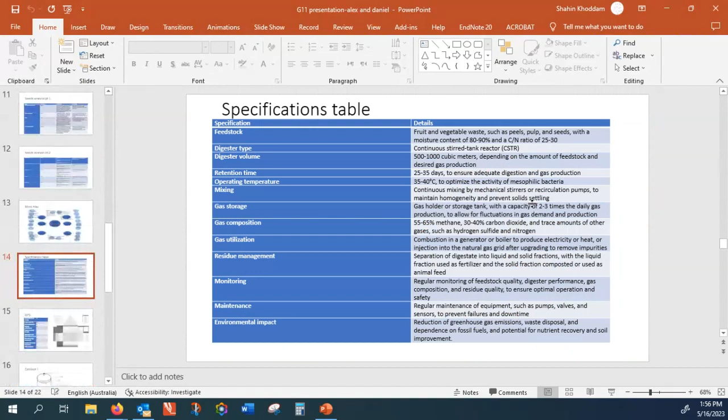I think I also sent it, you should be able to access it quickly on that one. All right, just let's make sure this is the one you want to present. I'll go through this quickly, just have a look. Yeah, this one has everything. Very good, and you know how to play this? Yep. All right, great. We've got 3 minutes to start, but don't rush. Just do Sultana's plenty of time. And let me check Sultana's presentation also.

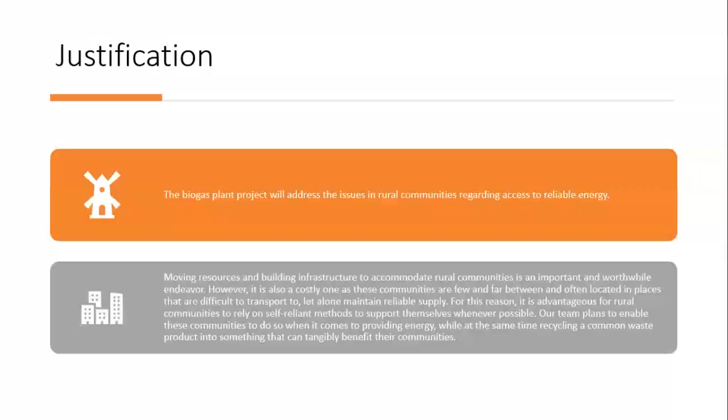Okay, good afternoon everyone, Noah, Kai, and everyone. Thanks for coming to this first presentation session. Today we have two presentations; one of them has been postponed to tomorrow, that of Noah, given that he is the only presenter. So we have plenty of time. It would be roughly about 15 minutes per presentation, followed by questions. Feel free to ask questions, and I'll provide feedback. The feedback isn't specifically directed at any one person, it's very general, so interpret how it applies to your case, okay? So for the first presentation, I invite Alex and Daniel. Would you start your presentation? Okay, thank you. One second.

Could you close the door?

So we did a biogas plant to generate gas from fruit and vegetable waste. The aim is to efficiently convert fruit and vegetable waste into biogas that can be used to produce energy, while reducing the amount of organic waste going to landfill. The facility will use anaerobic fermentation to produce biogas from waste, which can then be used for electricity, heat, or transport fuel. By producing renewable energy from waste, the plan is to promote sustainable development and environmental protection.

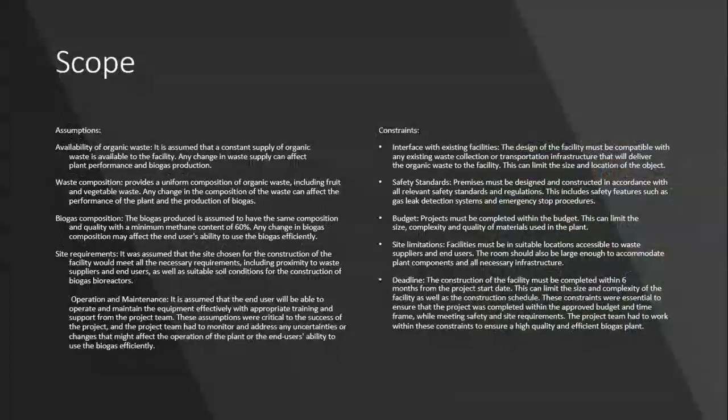For the scope assumptions, the first is availability of organic waste - it is assumed a constant supply is available to the facility, and any change can affect plant performance and biogas production. Waste composition provides a uniform composition of organic waste, including fruit and vegetable waste; any change in composition can affect performance. Regarding biogas composition, the biogas produced is assumed to have the same composition and quality, with a minimum methane content of 60%. Any change in biogas composition may affect the end user's ability to use it efficiently.

For site requirements, it's assumed the chosen site meets all necessary requirements, including proximity to waste suppliers and end users, as well as suitable soil conditions for construction of the bioreactors. For operation and maintenance, it is assumed the end user will be able to operate and maintain the equipment efficiently with appropriate training and support from the project team. These assumptions were critical to the project's success, and the team had to monitor and address any uncertainties or changes that might affect plant operation.

Other constraints: interface with existing facilities, the design must be compatible with any existing waste collection infrastructure that already supplies organic waste to the facility. This can limit the size and location of the plant. For safety standards, the premises must be designed and constructed in accordance with all relevant safety standards and regulations, including safety features such as gas leak detection systems and emergency stop procedures.

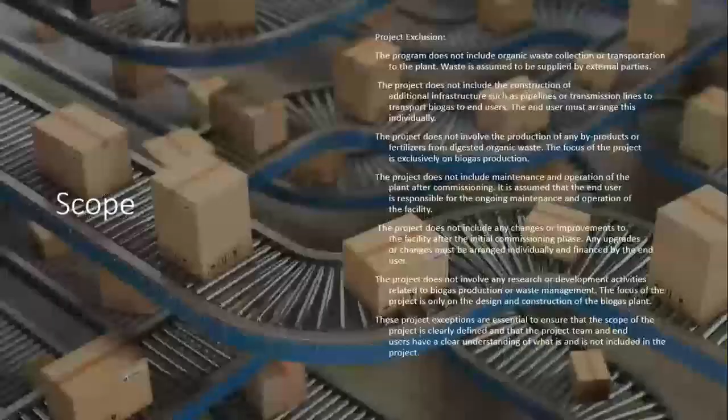The project exclusions: the program does not include organic waste collection or transportation to the plant. Waste is assumed to be supplied by external parties. The project does not include the construction of pipelines or extra transmission lines to transport biogas to the end users. The end user must arrange this individually.

The project does not involve the production of any byproduct fertilizers from digested organic waste. The focus of the project is exclusively on biogas production. The project does not include any changes or improvements to the facility after the initial commissioning phase. Any upgrades must be made individually by the end user.

These project exclusions are essential to ensure that the scope of the project is clearly defined and that the project team and end users all have a clear understanding of what is and what is not included in the project.

So, team communication methods: for the most part we used the Big Blue Button feature, which was within some of the infrastructure website and all that, right? But we were also able to communicate through text messages, and we did also meet up and all that. So we were able to communicate in response.

Yeah, this was one of our meetings. We've had, I think, 3. Yeah.

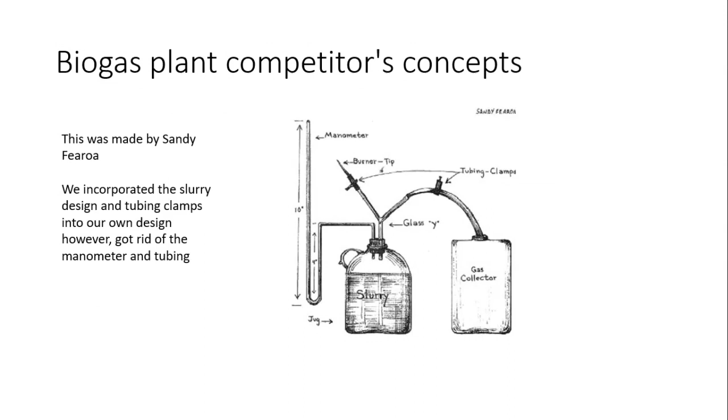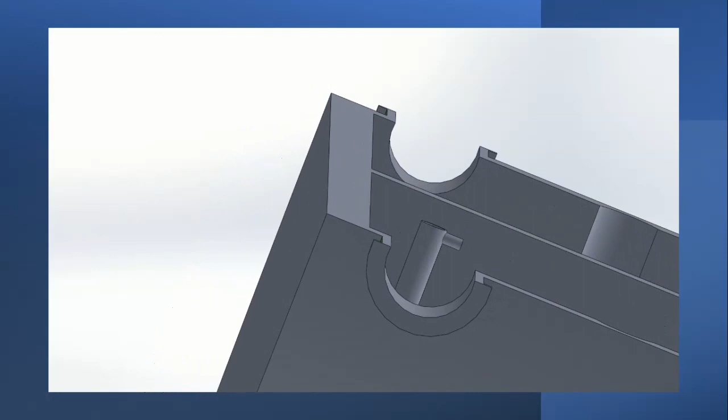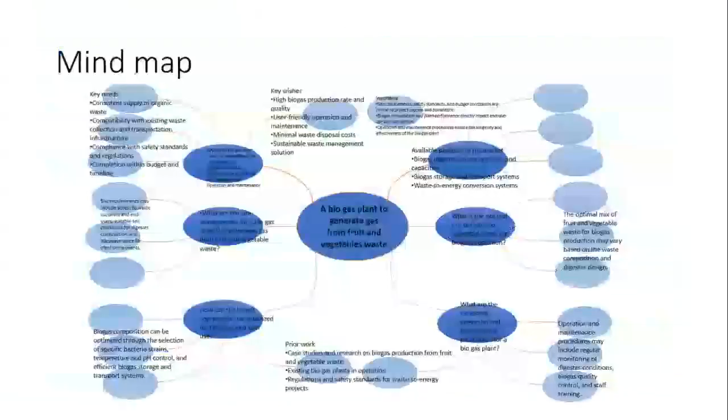On your question, how much does it cost? It's supposed to be a good one, so it would depend on a fixed number of things — there's the cost of producing the biogas itself, but you'd also have to take into account the operational costs over time. So it could vary depending on how you contract that.

Okay, any other questions? Yeah, alright, I have some questions. Thank you for the nice job you did.

Well, a presentation — a few generic comments that apply to every presentation. You want the text to be readable by the audience, so the font size is very critical. I bet people sitting back have difficulty reading some of it, it's too small. When doing an oral presentation, it's expected that a minimal amount of content appears on screen, and everything else people expect to hear from you.

There are two extreme cases of people doing presentations. One extreme is being overconfident — no matter what they're presenting, they oversell it, and you feel they've done something really great when nothing is there. The other extreme is being too modest with respect to what you have done. It's always best to be in between.

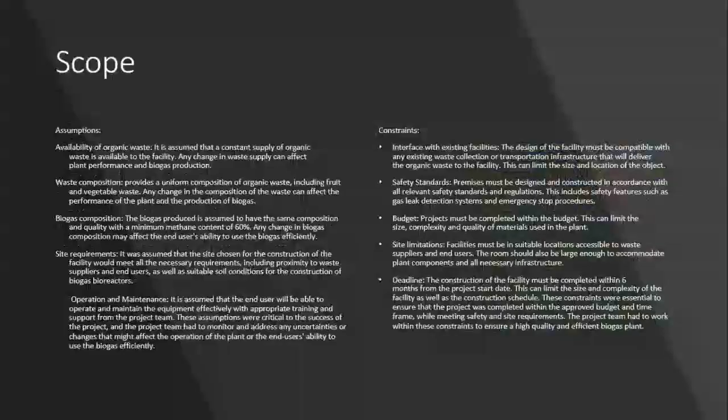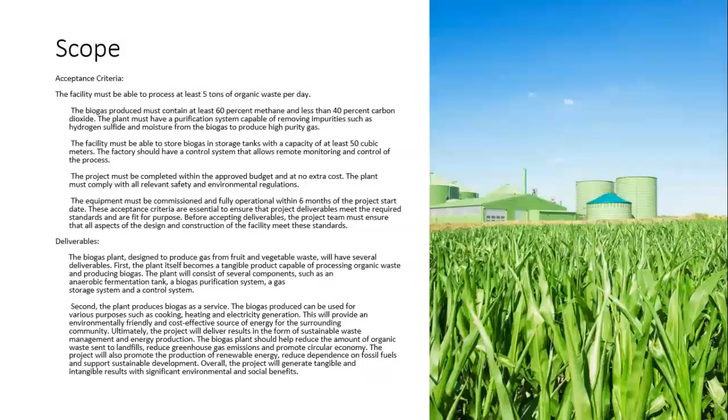Temperature control, what kind of environment is this being used in? This is for a humid environment, this is for a hot environment, for cold environment. So these kind of things are making your design different with someone else's. And you see this scope, bullet item, smaller, something measurable, something verifiable. These are more preferred.

Communication methods, yes, BigBlueButton. I had a fight with IT department regarding BigBlueButton, and you know what? People who don't care, they never get the blame. For that fight, I'm being blamed by my manager. Why have you been so harsh to the IT?

And then, yes, this is a tool. We are paying for it. We are supposed to use it, but that was not very useful, as long as the recording either did not happen or they disappeared too quickly. So my manager preferred to just take the easy part, say why did you be so harsh, rather than saying, look, we need a tool to give the students to do their job.

Anyway, so with the minutes of meeting, it's good to give a good statistic to say, look, we had one meeting, we had two meetings, we had a 10-minute meeting, something like that. These were the agenda, these were the decisions taken. So that's what we expect to see from the minutes of meeting.

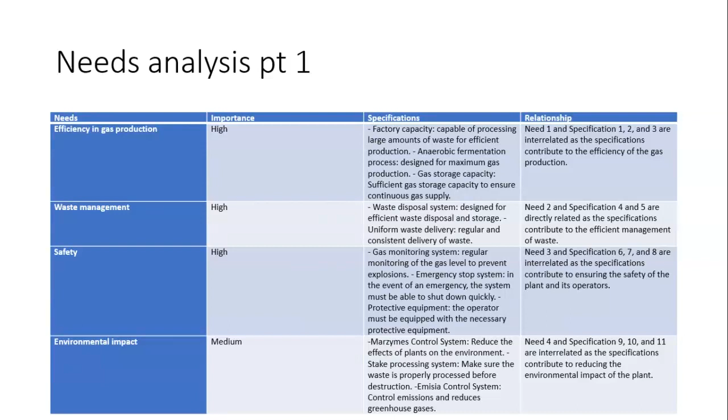When you are putting something like here, again, need list, none of these things are measurable. Safety, waste management, so these are high, low, medium. How these are going to be verified, right?

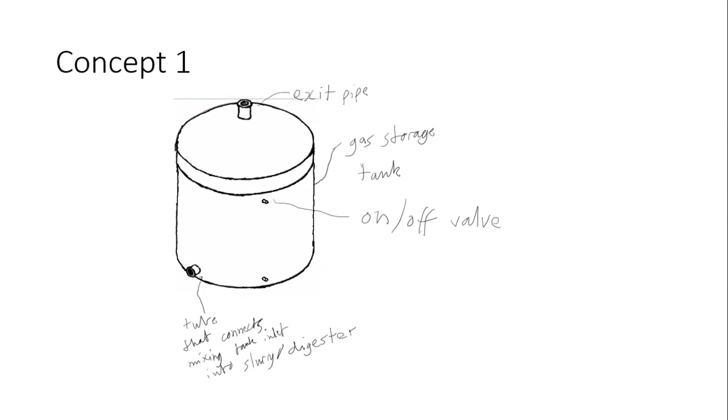And bill of material, I was expecting to see them. Unfortunately, that was not here. And when you are including some illustration, it's okay to take them from a patent, but make sure you include the patent number wherever it's been taken from. Is it professional? And in case if someone wants to pursue your work, they have a reference, we go and get it from there with more detail and then reading that. So this one was not very informative. I struggled to understand how this one is.

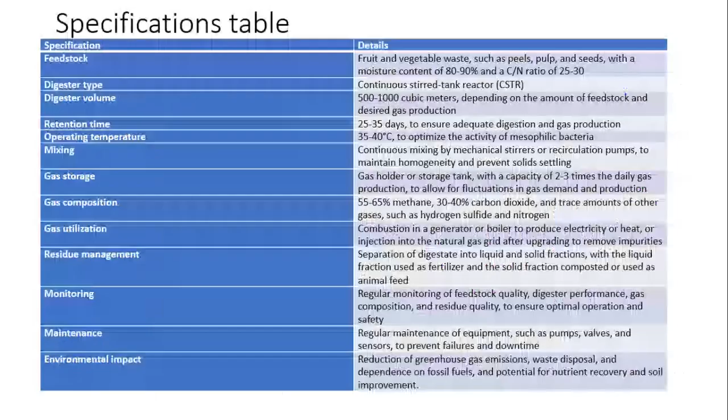Yes, and I'm going reverse. Okay, this one.

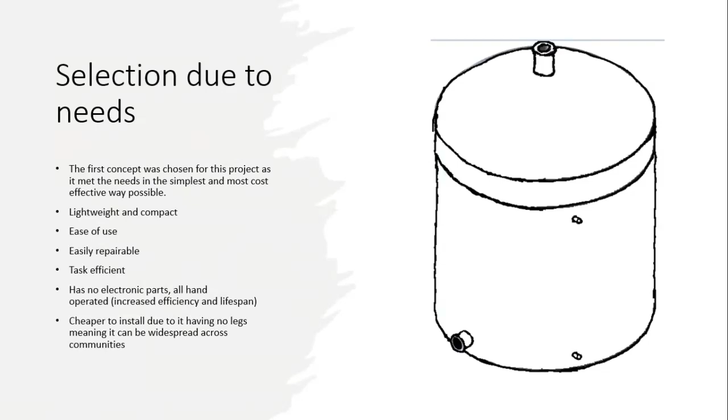Okay, I expected to see some kind of calculation to give them a score, and then how did you justify the choice of one concept compared to the others?

That's a good job. But yeah, something like choice of material, choice of manufacturing, whether you find something usable for repair - that was the main idea. I mean, here your clients are people who cannot spend money as such, so they prefer to find something which is useless and bring it back to life. So that kind of initiative, this was good, yes.

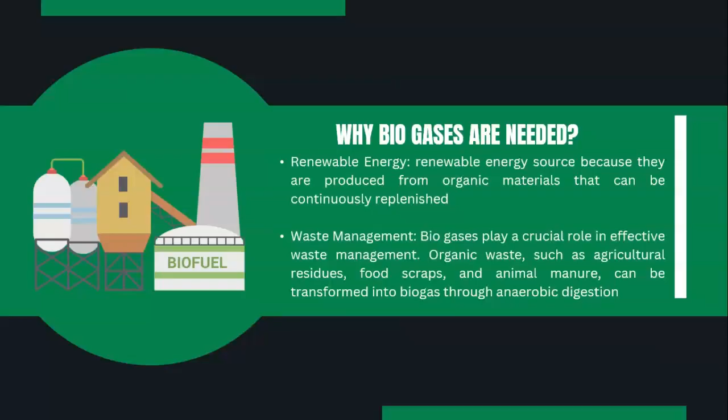Good evening, guys. Today I'm here to present the innovation and sustainable solution that's free gas at home - totally a biogas system.

Why do we need biogas in our life? It's a totally renewable energy source because it is produced from organic materials that can be continuously replenished.

And the second one is waste management. Biogas plays a crucial role in effective waste management. Organic waste such as agricultural residues, food scraps, and animal waste can be transformed into biogas.

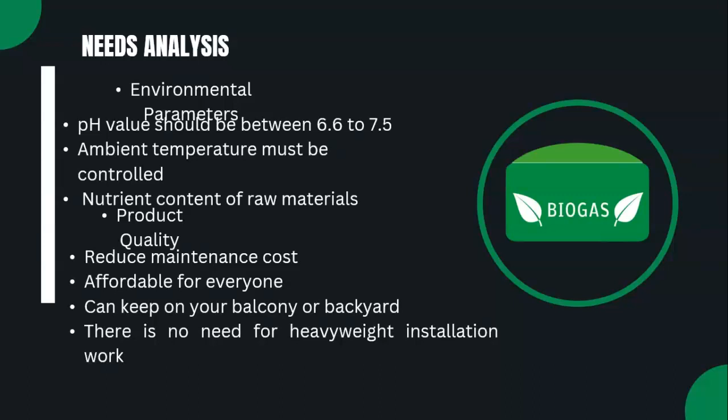That's reduced maintenance costs and affordable for everyone, and it can be kept on your balcony or backyard at home. There's no need for heavyweight installation work. That's my needs analysis.

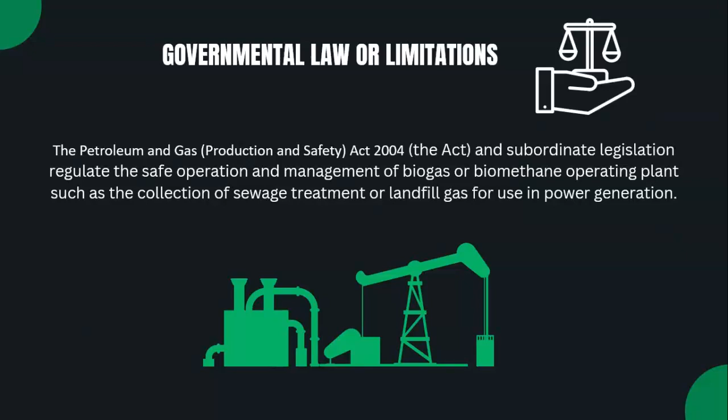So this is my mind map. First of all, I have a portable biogas unit. This covers the advantages, resources, and materials. The materials have durability and safety, and for resources I used Google Patents, Google Scholar, research articles, and Australian government websites.

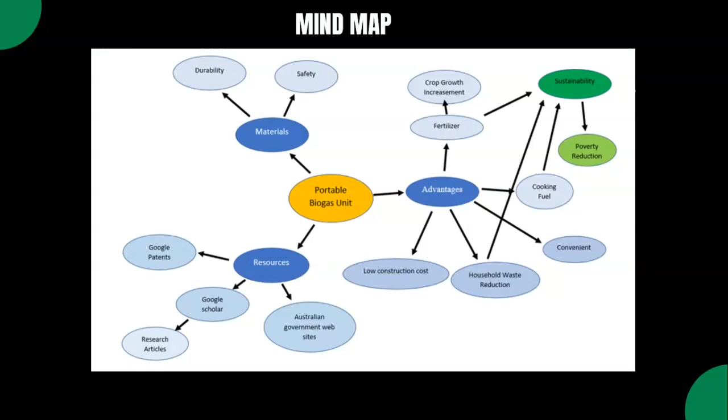Next part is my Gantt chart. This is my timeline: first is selection and understanding of the project, next is project planning, then introduction and research.

This covers background, mind map, and analysis of needs. The third one is project development - cost analysis, drawings, and everything related to government rules and regulations. The last one is presentation of my final project, including slide preparation, final project, and feedback.

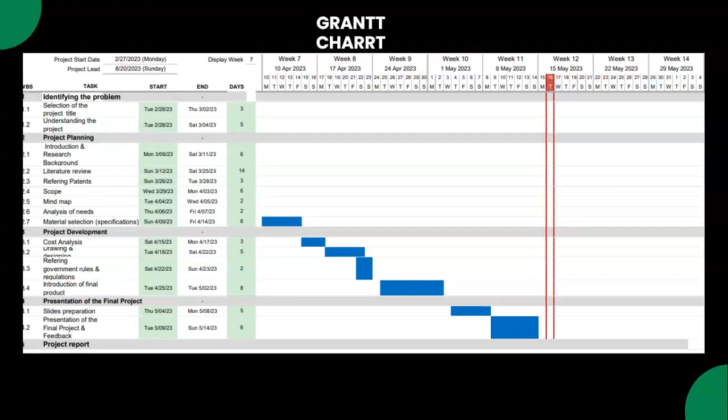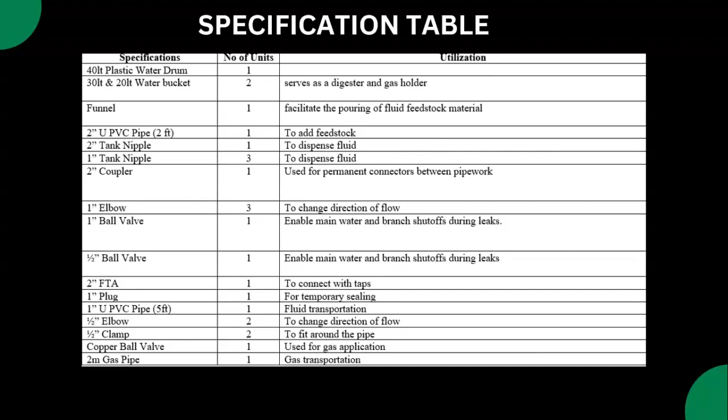This is my specification table, this is my funnel, and these are my materials: UPVC pipe, tank, nipples, couplers, elbows - there's a lot of these kinds of things I'm using in my project.

This is my house of quality analysis. This is my main focus - an affordable price for our customer or client. That's the main thing I'm focusing on for this project.

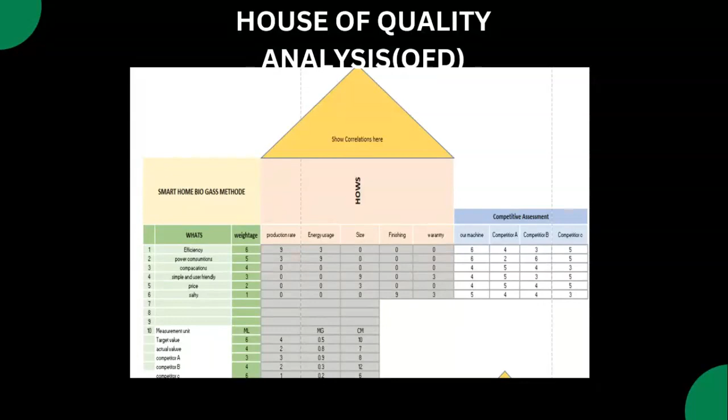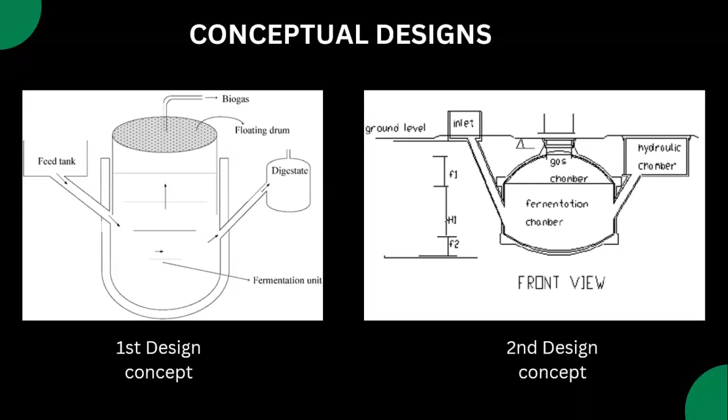This is my first design concept and second design concept. The first one is a bio tank, and the second one is an underground bio tank. Based on these two concepts, I developed my final concept.

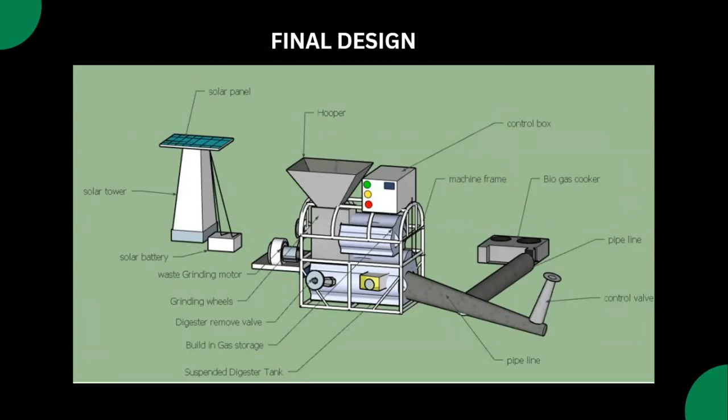That's an output, an outway to the gas system. This is the control valve. We can control our gas pressure, gas temperature.

The mechanism has a small controlling unit to control the condition of the motor, valves, heater, and fan.

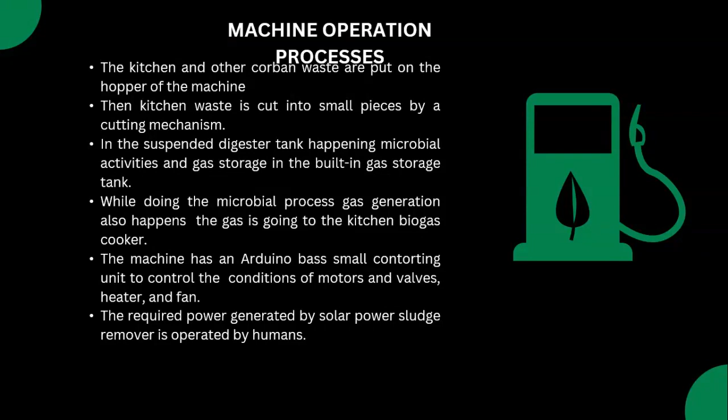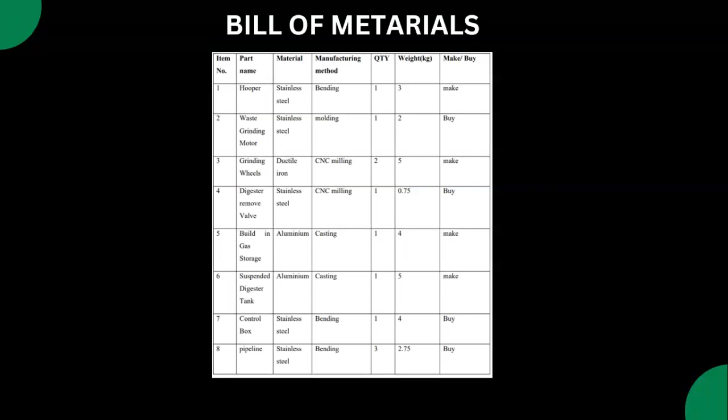That's my bill of materials: the waste grinding motor, grinding wheels, digester remove valve, the built-in gas storage and suspended digester tank, controller box, pipelines.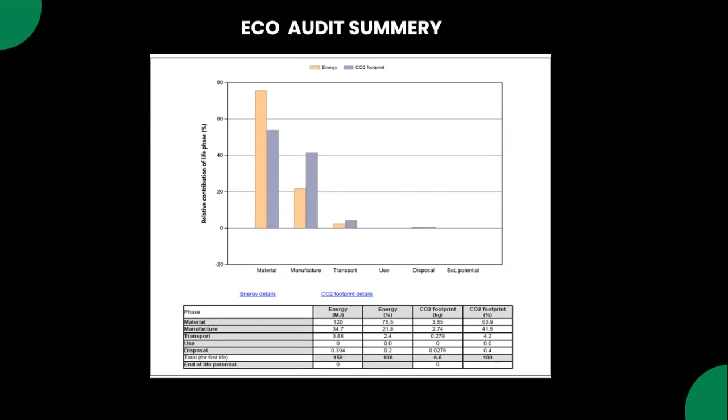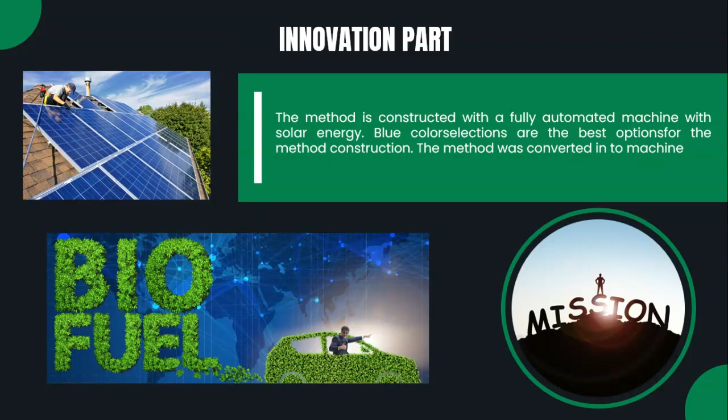Okay, so give me that one, please. While you're thinking, I have some questions. All right, so starting from the beginning...

That was reasonably good work, given that none of your team members were engaged. I noticed that you did that by yourself, and that is appreciated.

Yes, the quality of the slides - they are quite readable. You started with the significance, which is how every presentation should start. That is the most important part of the presentation. You have just some time to get the attention of the audience. If the start is not catchy, not attractive enough, maybe people decide not to listen to it.

A very good start is telling people why you are doing this, why this is important. Give them some background information that you can easily access through commonly available statistics. The statistics are eye-openers - people would be surprised to see the numbers. They don't know how much money they pay, for example, for fuel in a rural community, what their problems are. If you put in some statistics, that makes it really catchy.

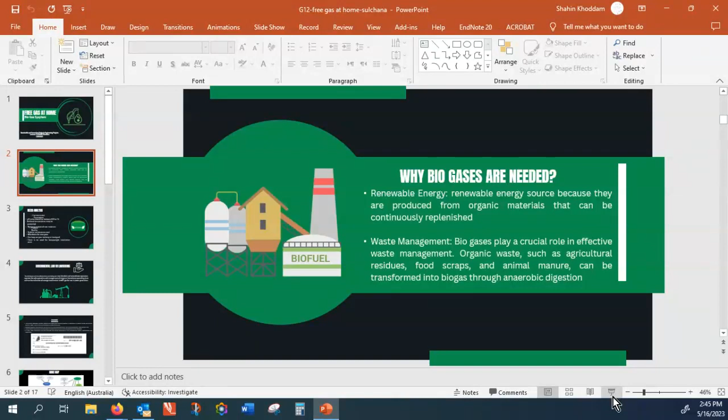Okay, so that's a good start. And when you went into the need analysis, some of your items are quite well measurable, like pH, but the ambient temperature one must be controlled. That is good, but you could be more specific.

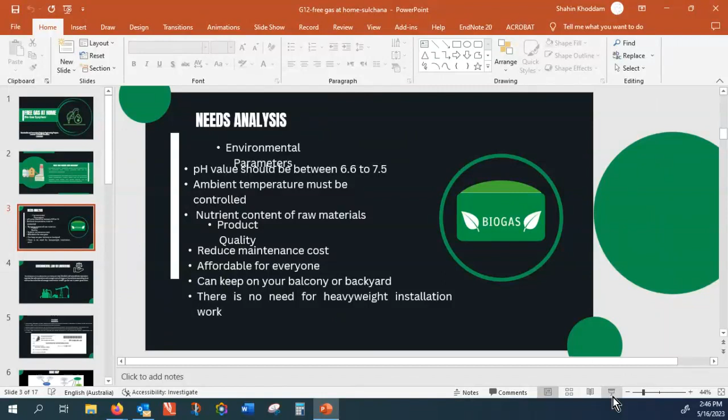Reduce maintenance costs - so all these things are not easy to agree on with someone. Maybe the way you want to conclude that is different from someone else. If you make something concrete with numbers, measurable, verifiable, that is good.

That's a very interesting part of your work. That is the responsibility of the designer - to look for the regulation, restriction, limitation. And I want every presentation, every report, to show this. I'm not saying don't miss a document or a standard. That's very difficult - you never know how many standards or regulations there are.

But in real life, if you miss a regulation or a standard, what happens? You spend some time, you invest in something, and then you're not authorized to do that because it's against the law. That's the first thing you want to check. That would be too bad. But for this subject, I want you to show an awareness - just show me, look, I care about the limitation, I care about the regulation, and I think you demonstrated that quite well.

And the mind map, again, that was a good one, but I strongly suggest everyone please try to use professional mind map software. This kind of mind map is torturing yourself - that tool is not made for making mind maps. A professional mind map software is easy to work with, is efficient.

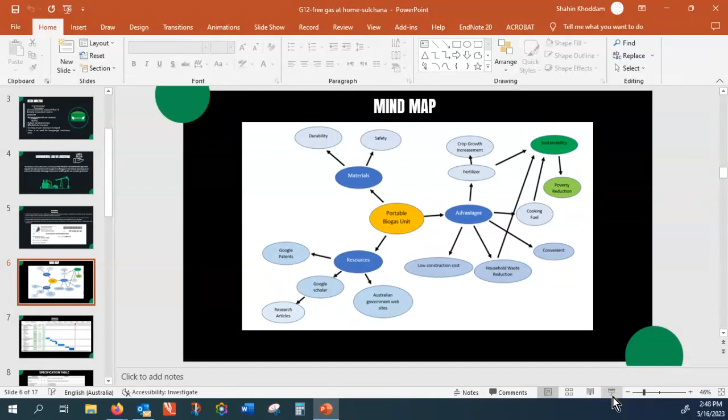Here, if you want to add more detail, there's no room in this space. But in a mind map software, you can add as many images, links, hyperlinks, everything, and you can do an ongoing job on that.

Maybe you didn't plan them, but if you would, that would have been the same steps, because every design should go through a sequential, logical order. You start with customer negotiation, understanding the problem, finalizing the need, finalizing the specification, bringing the concept, freezing the concept, going to the detailed design. So when making the Gantt chart, use these 7 steps sequentially, and then add detailed steps to those.

So when gathering the concept, what are the steps? What are the subtasks? Include them there. When did you do it? Who did it? What resources did you need for that? These are the typical things which go into the Gantt chart.

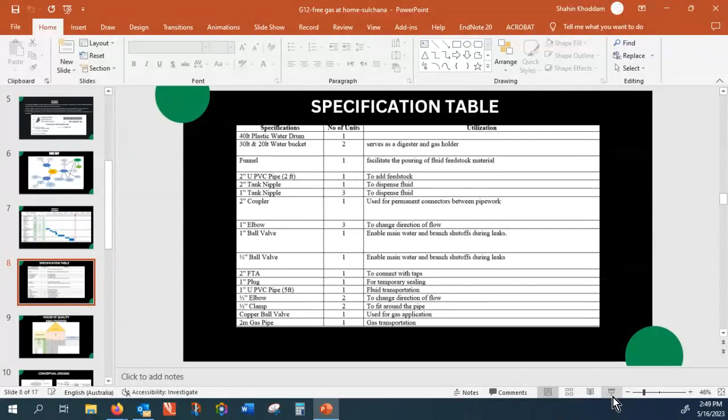And I noticed you included a specification table. How do they relate to the need? You have to demonstrate which specification links to which need. That is not quite complete. I wanted to see the interaction, so these numbers have to be identical between your need list and your specification.

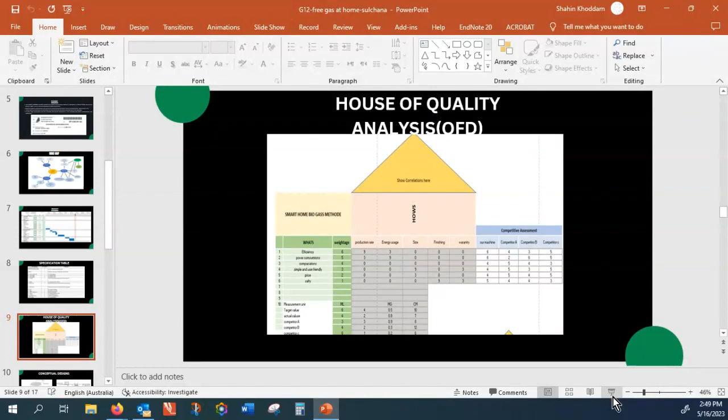Okay, all right, so you notice that with computer-aided design, we can afford not to use them, right? For something serious like this, when referring to the control, Arduino is something good for programming, but I'd rather have something simple but complete rather than something comprehensive but not detailed enough.

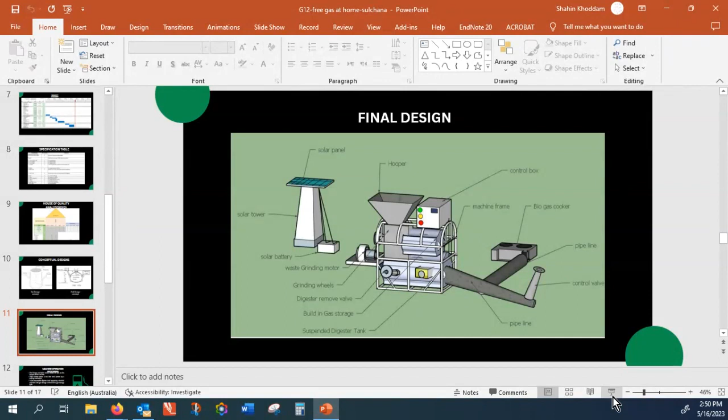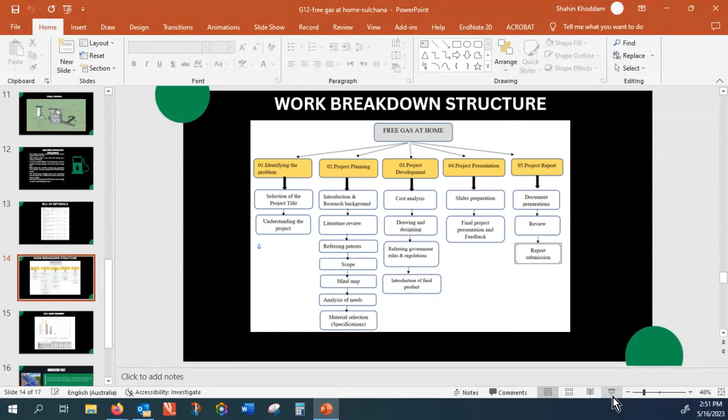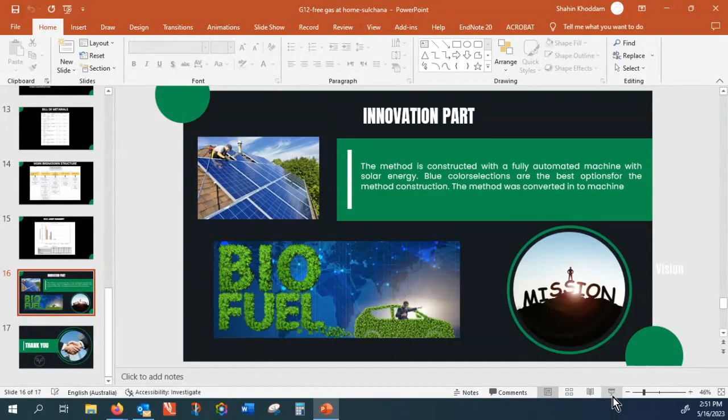Okay, so yeah, that explains your detailed design well, how the subsystems are working together. And operation, you went through the explanation, that's good. Bill of material, eco audit, work breakdown structure, these are deliverable items every project should have. And the eco audit, yep, you're using a solar panel for operating the system. That is a good step. And altogether, given that you worked on your own, I'm happy with your performance.

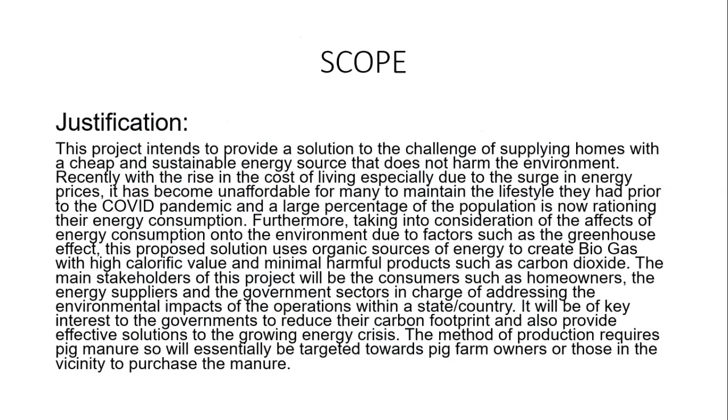It is the product scope description. This one is the acceptance criteria of this project.

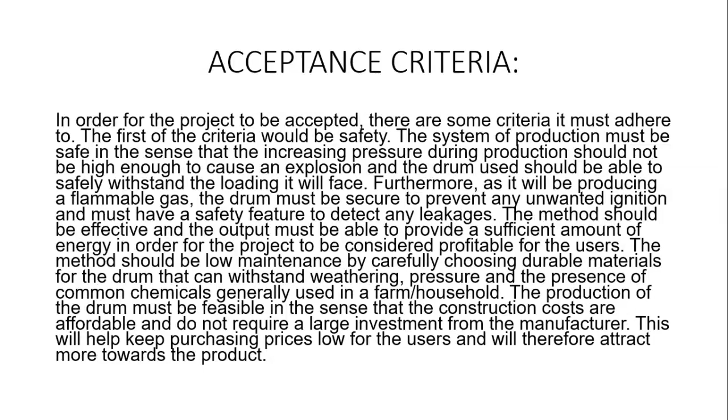I have given some information here. In order for the project to be accepted, there are some criteria it must adhere to, like it must be safe for production, and these types of things. Furthermore, as it will be producing a flammable gas, the drum must be secure to prevent any unwanted ignition, and must be effective, and the output must provide a sufficient amount of energy for the project to be considered profitable for the users. Because at the end we have to see the profit, the efficiency, and the output we are getting.

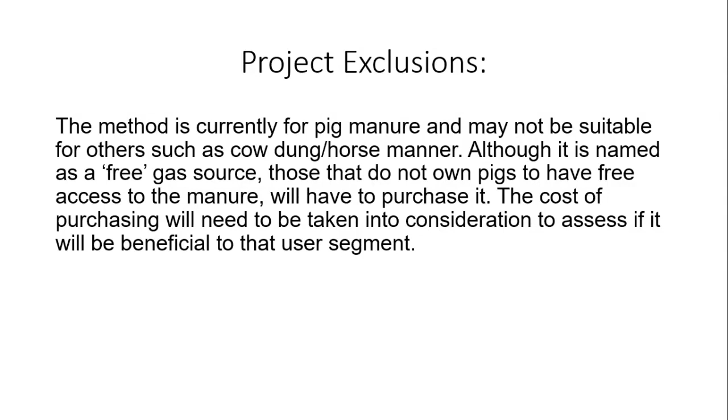After that we are talking about the deliverables, project exclusions. This method is currently for pig manure and may not be suitable for others such as cow dung or horse manure. Although it is named as a free gas source, anyone who does not have free access to the manure will have to purchase it. Here we are talking about the constraints.

At the end, when we are defining the scope of the free gas at home project, it is assumptions. This is the last part of the scope, and it is assumptions. The assumptions must be made.

We will need assumptions made as to how many people are able to use the product as the key ingredient is pig manure. The system can only be useful for those who have access to the manure as an assumption. We will therefore need to meet the demand.

This can be made by considering the number of pig farms in the area, looking at the average amount of manure produced in kg, and the energy consumption of the site by running tests on the production method to see how much energy is produced per kg of pig manure. It is possible to see how much energy can be produced per site based on its manure supply. It will therefore be possible to analyze if the energy produced will be beneficial to the consumers or not.

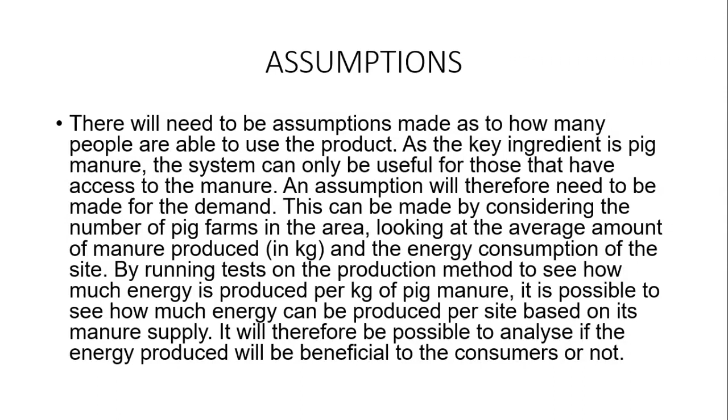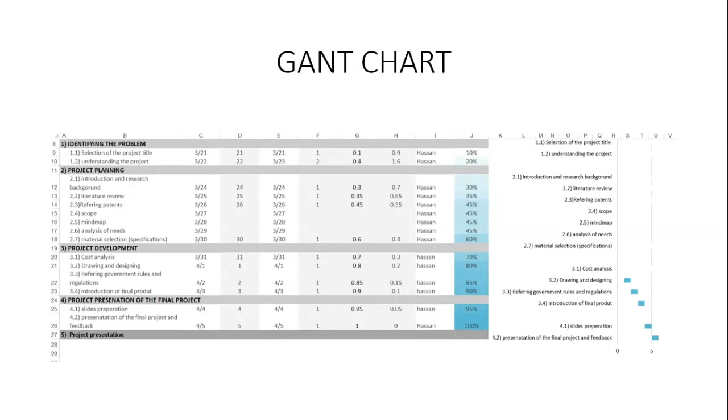In identifying, it comes a selection, understanding. In planning it comes an introduction, review, referring, scope, mind map, analysis and material selection. In the third one, project development, it comes the analysis of cost, drawing and designing, referring government rules, introduction of final product, project. In the fourth one, project presentation of the final project, it is slides preparation, presentation of final project and feedback, and at the end it comes the project presentation. Needs analysis.

It is efficient. It is the design embodiment. Here it is a bucket, a 30-liter bucket, and this hole is made for ventilation. 75% of waste and 25% of water. The total covered area includes 75% of waste and 25% of water. And it is the things used, like a ¾ inch clamp, uPVC pipe plug elbow, and then an FTA plug tank nipple elbow.

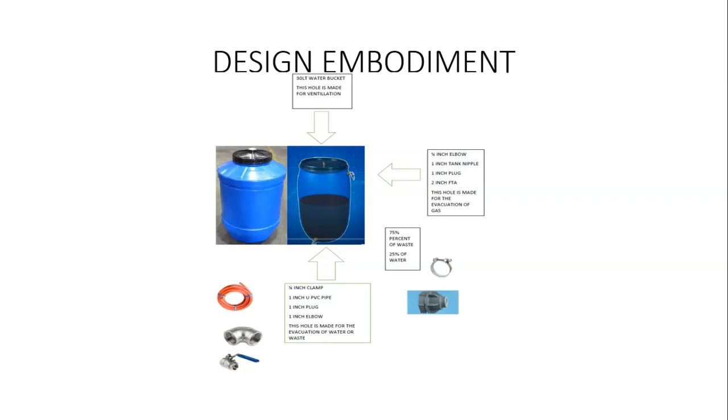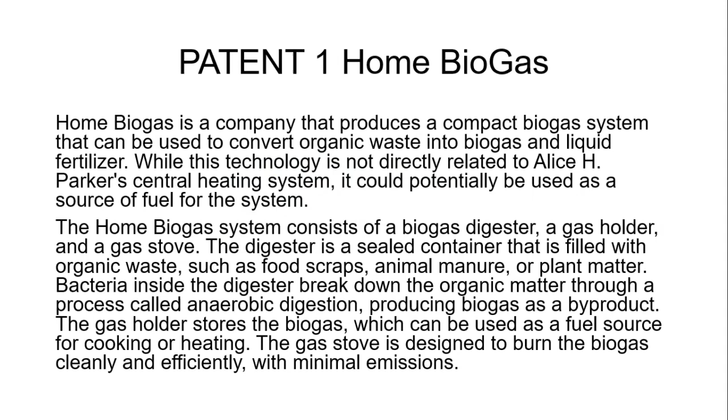It is a patent. It is the first patent. This one.

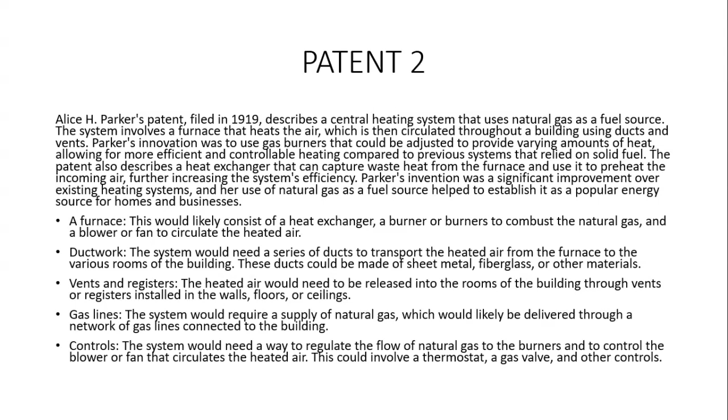It is the second patent, and it is about the central heating system. This one, this is a patent of a central heating system.

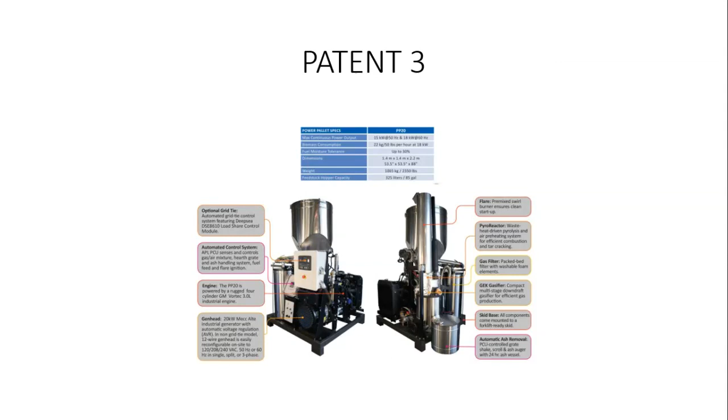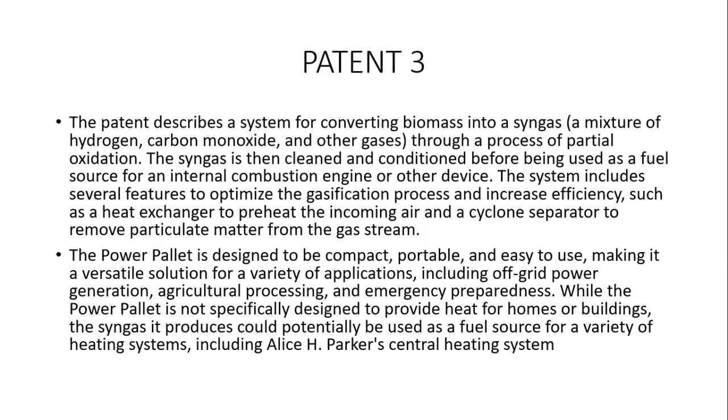This one is the third patent. The patent describes a system for converting biomass into syngas through a process of partial oxidation. The power pallet is designed to be compact, portable, and easy to use, making it a versatile solution for a variety of applications.

Bill of materials. It is a bill of material for a simple design to make free gas at home using a gas tank, pipe, and valves.

Gas tank: a 20-pound propane tank can be used as a gas storage tank. Gas pipe: a pipe that connects the gas outlet of the gas tank to the control valve. Control valve: a valve that regulates the flow of gas from the gas tank to the stove. Pressure regulator: a device that regulates the pressure of the gas flowing from the gas tank to the stove.

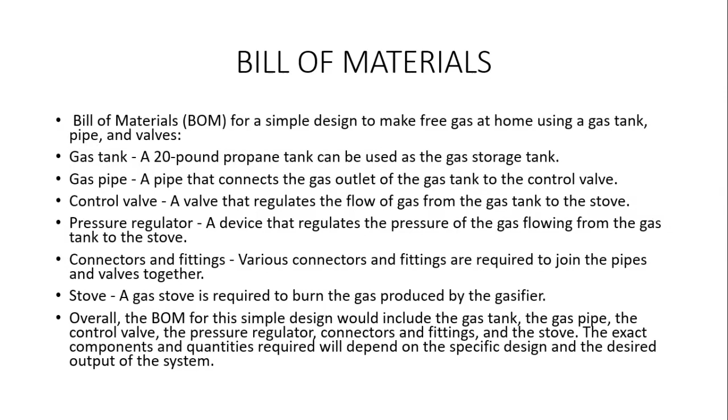Connectors and fittings: various connectors and fittings are required to join the pipes and valves together. Stove: a gas stove is required to burn the gas produced by the gasifier. Overall, the BOM for this simple design will include the gas tank, the gas pipe, the control valve, the pressure regulator, connectors and fittings, and the stove. The exact components and quantities required will depend on the specific design of the system.

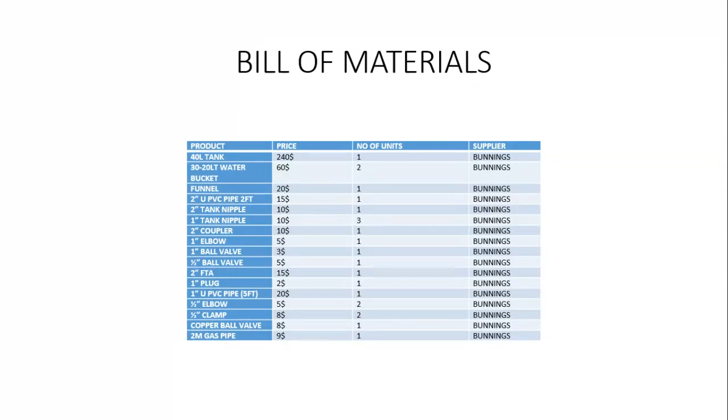It is the bill of materials, like product, 40-liter tank, price, number of units, supply for all is the same, but the price is different, the number of units is different. Like half-inch clamp is for $8, and 2 are needed, and the supplier is Bunnings.

Now it is the work breakdown structure, like identifying the problem. For identifying the problem, the first 1.1 task is selection of the project title, understanding the project, and after that, when we have identified the problem, then the second step is that we have to plan, project planning.

In project planning, first it comes introduction and research background, literature review, analysis of need, materials selection, and when we go to the third part it comes cost analysis, drawing and design, and the third part of it is referring to government rules and regulations.

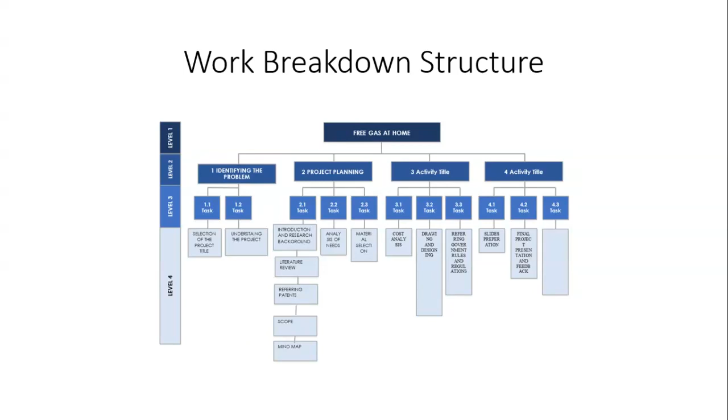The fourth part is slides preparation. The 4.2 is final project presentation and feedback. These four are the parts of it.

This one is, at the end, the cost and risk analysis. Cost analysis: gas tank, gasifier, materials, fuel source, cost analysis.

The cost of making free gas at home depends on several factors, including the size of the gas tank, the cost of materials, and the availability of organic waste and other fuel sources. Here are some of the cost factors to consider.

Gas tank: a gas tank is required to store the gas produced by the gasifier. The cost of the tank will depend on its size and capacity. A typical 20-pound propane tank can cost around $40 to $50.

Gasifier: the cost of a gasifier can vary widely depending on the size and complexity of the system. A basic gasifier can cost anywhere from a few hundred dollars to several thousand dollars. Materials: other materials required to build the gasifier, such as pipes, valves, and fittings, will also add to the cost.

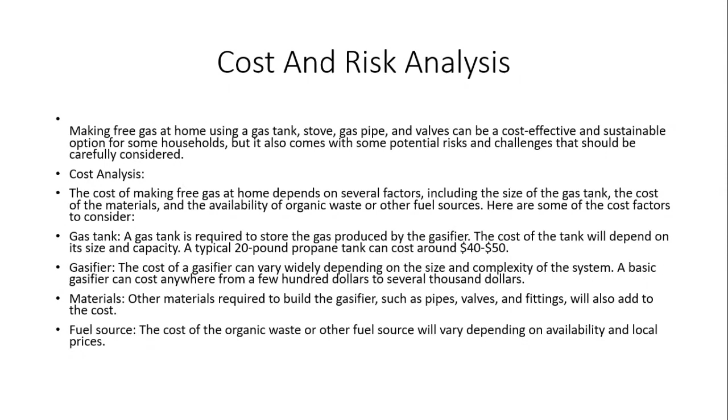Fuel source: the cost of the organic waste or other fuel source will vary depending on availability and local prices. As we have used pig manure here, this will be the only organic waste we use.

After that comes the risk analysis. This part tells all the risks affiliated with this project, like fire and explosion, health risk, maintenance, legal and regulatory. Like previously I told about the rules, local rules.

So here it is telling that making free gas at home can be a sustainable and cost-effective option. It also comes with some potential risks and challenges that should be carefully considered before starting the process. There are some potential risks to consider.

Fire and explosion: one of the most important risks is that we have to prevent the deposit of gas. So we have to focus on fire and explosion. It is the biggest risk, as gas produced by a gasifier can be highly flammable and explosive if not handled properly. Careful attention should be paid to safety precautions such as ensuring adequate ventilation, avoiding leaks, and using flame arresters or other safety devices.

Health risk: the second biggest risk is the health risk. Gasifiers can produce harmful emissions such as carbon monoxide, which is one of the biggest concerns, and other pollutants if not properly designed and operated. Proper ventilation and air quality monitoring are essential to minimize health risk.

Maintenance: gasifiers require regular maintenance and training to operate efficiently and safely. This can be time consuming and may require specialized knowledge or skill.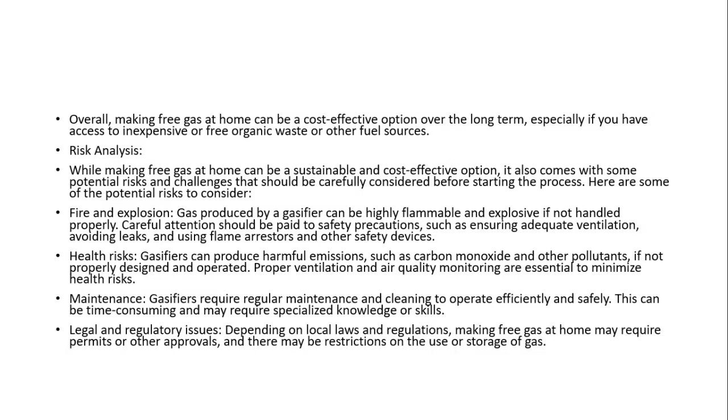And at the end, it concludes that while making free gas at home can be cost effective and a sustainable option, it is important to carefully consider the potential risks and challenges before embarking on the process.

Fuel source: the cost of the organic waste or fuel source will vary depending on availability and local prices. Let's assume a hypothetical cost of $50 per month for fuel, using waste such as pig manure.

And at the end, here comes the total cost. It tells all the costs, and so the total cost will set up and operate the gasifier to make gas at home.

Initial investment: this is not the exact figure, but it is around $1,240 for the gas tank plus gasifier and materials. This is the initial investment which I have assumed, and it can be different for you.

Monthly operating cost is $50 for fuel, which is the pig manure being used. It is important to note that these are hypothetical prices and actual costs may vary depending on factors such as local location, availability of materials, and the specific type of gasifier.

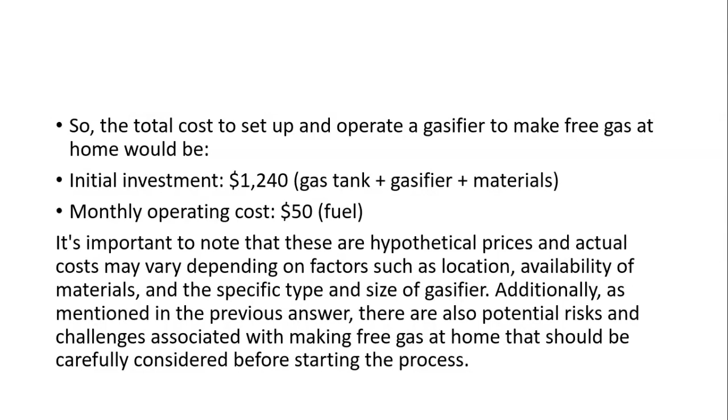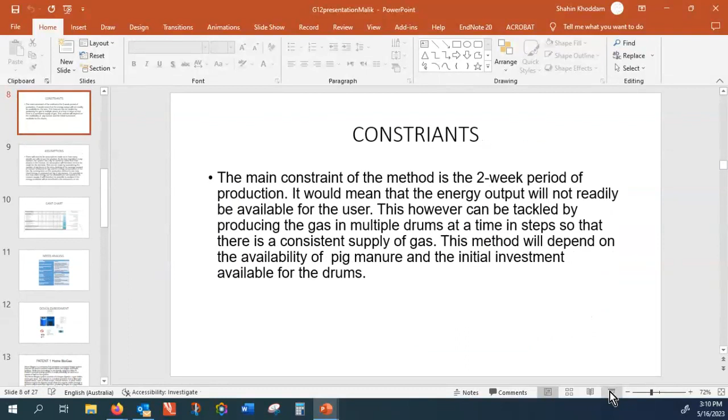So is that cost for one person or for a group of people? No, it is for the project, it can be different for you. It is an assumption made by me. For you it can be different, for Siva it can be different. For myself it is not fixed, it is flexible, it is made by me. If you made this it can be different for everyone, but it is just around that.

Okay, no more questions? I have a few. Okay.

Hassan, I noticed that you did this project by yourself. You were supposed to be part of a team, so failing to work in teamwork is not a good sign.

This is a subject of the unit learning outcome. I know this is difficult for some of us, this is the first time we try to reach other people, maybe not in the same class, but believe me, by doing this that's the only way we learn how to socialize, how to get the work done, and that's what will be expected in future work.

So again, my main comment: we expected to see some product, and that didn't happen. This is like you invite someone for dinner and tell them nice stories about delicious food and everything, you get them hungry, and then at the end you don't serve them the food. I expected to see some demonstration of what we discussed in the lecture and in the computer lab. Some of these are related, but I still wait to see your final report.

I'm not quite happy with what you presented here. Some key elements like 3D modeling are missing.

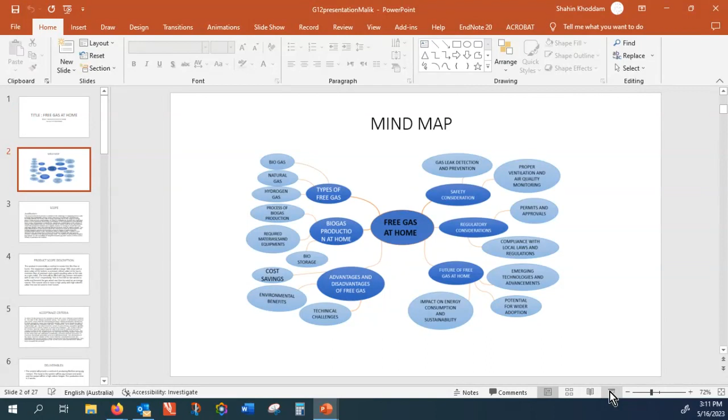The good thing again is the mind map, you have to use a professional tool for making the mind map so the contents are somehow organized. Using the mind map lets you add more layers, more detail, useful into this.

And people are always afraid, saying I'm going to lose my job, robots are going to take my role. And you know what, read-aloud is a major threat.

It's not only Adobe Acrobat that does the reading aloud, even all new Microsoft products have that feature. So all you have to do is load the document, click a button, and it reads through the document for you. So you have to do something. This is I really want to give you something to get you prepared for what you will be facing.

That's not going to be easy. People are doing very great jobs, they are successful in business, but if they don't anticipate the risks and threats in the future, they could easily be out of market. You might have heard that Jenny Craig went bankrupt just 2, 3 days ago. I remember only 15, 20 years ago she was a very successful business person running the program for losing weight. Everyone wants it, but if you're not aware of what development is happening around you, this is a big risk. You have to do something that robots cannot do, that artificial intelligence cannot do, and reading through the slide, believe me, that's not going to secure you a job.

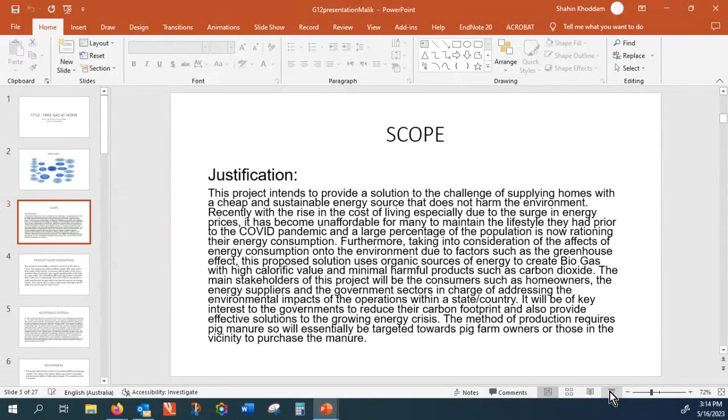Make sure this subject, we try to share with you. I'm not saying these are state of the art technologies or tools, but just using them is better than nothing.

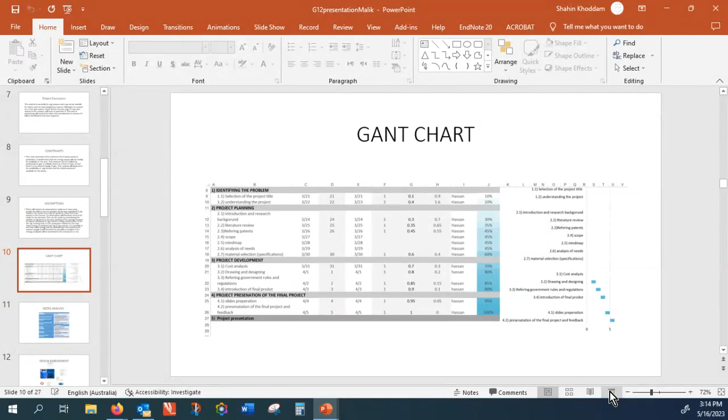With your presentation, this is not organized in a way that I wanted you to do, in the logical order of a generic project. The 7 steps are not shown here. And I guess that project is a safety and health issue. You can minimize it, I'm not saying don't go for it, that was the title of the topic, but how can you avoid some of the problems?

For example, this one, I don't see any sewage system. So there are effective periods for using this device, 1 week, 1 month, 6 months, I don't know how long, but eventually you need to empty that and refill it. People get something like this, it's not healthy, with all these pig manures in it, they have to empty it from the top. Whereas sewage is a big system. If that's used in an agricultural system, maybe that can be directed to the agricultural land for fertilizer, or that's something really, as a designer, you have to be mindful of.

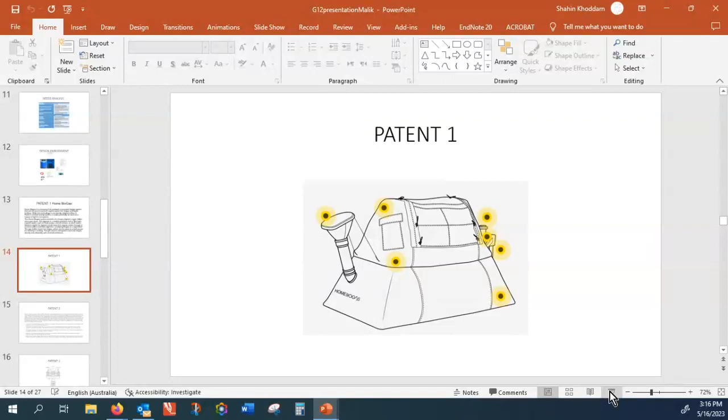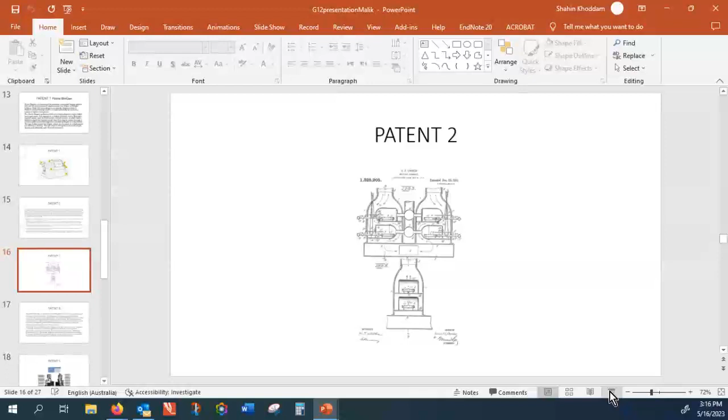The patent is good, you chose the number of the patent, but I wanted to see more graphics rather than text, something visual, something with an exploded view, numbers, for people to understand this. From here, how am I supposed to understand what this thing is? I'm sure in the patent there are enough details, but your selection doesn't tell me much, and your explanation didn't add to it either. So I can hardly see the number or the subsystem, understand what they do, or the specification table.

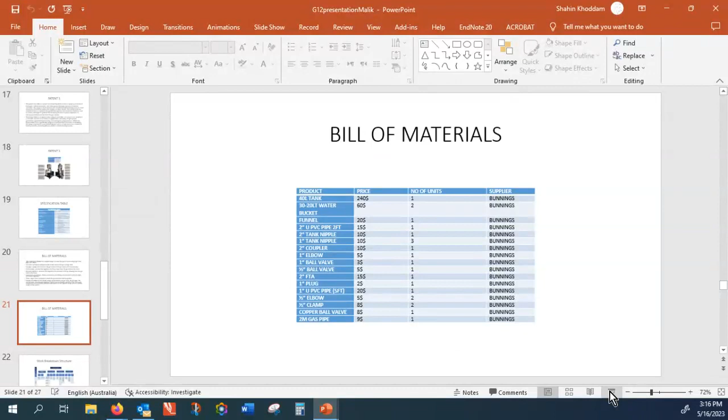Again, my concern is the bill of material is not related to an existing product. 3D model, animation, all those graphic things could be here, but they are not. I'll wait to see your week 12 report, and that can make a big difference. I hope you can address as many of these things, and also the checklist in the announcement I mentioned, make sure to go there and touch on everything, show some awareness. I know the topic, I can communicate with what was discussed, what was explained, exemplified, and I can apply this to a generic project. That's all I want, it's not a big request. Don't let me down.

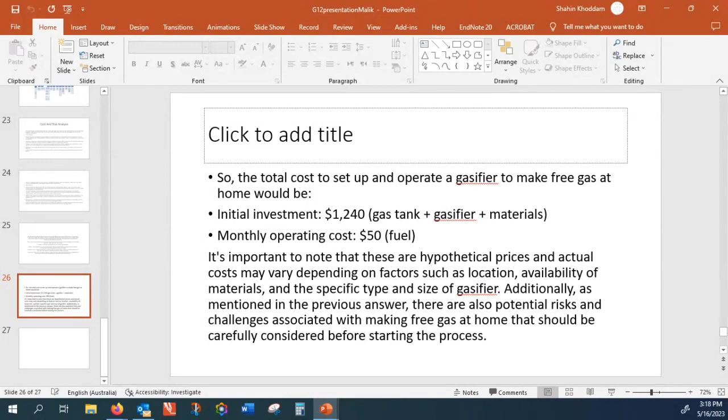This presentation is like 15